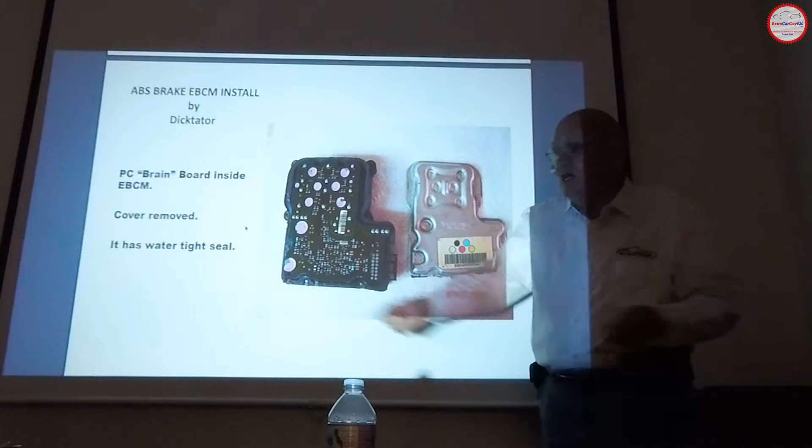Now here's what happened with copper impregnated boards. They use low temp solder when they go through the PC board wave bath solder. They go through, and they use low temp solder. Then you're 3 inches away from a catalytic converter that's running at 1800 degrees. And eventually, because you're in town stopping at traffic lights and bouncing, these become unsoldered. This is where the relay connection is, and these have to be soldered, and these have to be resoldered, and all of these have to be resoldered.

How do I know? Because that's what I do. I use the high temp solder on the bottom side of the board. I clean all of this solder off, I get back in it, and then I resolder it. 99 times out of 100, that's what it is. I got one the other day where the relay is bad, and that relay has to be taken off, so I gotta take the whole printed circuit board out and change the relay. Now, my SoCal guy did a heat shield.

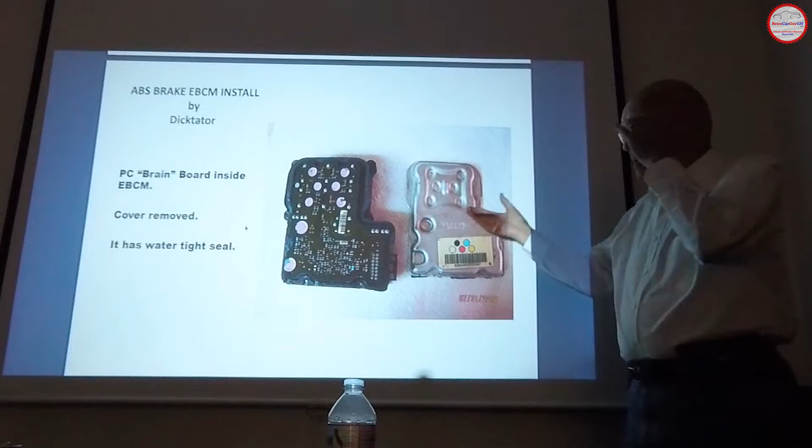Yeah, I had that heat shield put in. Would it take care of that or not quite? Maybe. Here's what happened. Mike and I were trying to address this ABS system, because you can't get these in as far as I know. Actually, one of the owners in Sacramento said he was able to buy that off of rockauto.com. He got one and had the shop put it in, but it ended up not working, because the 0304 won't work on the 0506.

Already been there, done that. We tried it. Well, here's the biggest thing: even if we could find another one somewhere, it wouldn't have the higher temperature solder. No, I mean, it's all going to be waste. So anyway, I use a desoldering tool to suck all of that off, and I put new solder on.

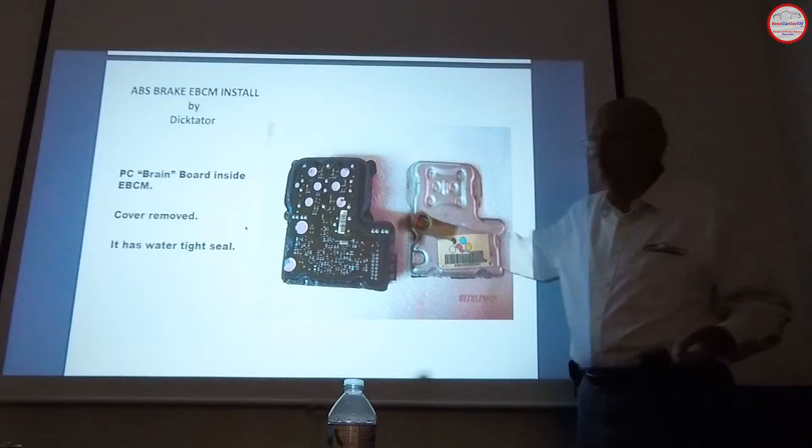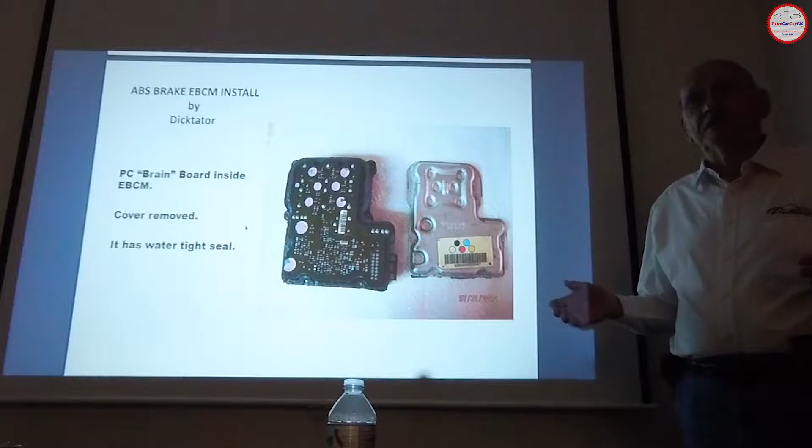And then we went to the heat shield, Mike and I talked. He's using aircraft insulation, or whatever it is, on that piece. We're saying for $50, it's worth a try. The jury's out on whether it will totally eliminate the problem or not, but it certainly will reduce the potential. Cheap insurance, right. That's very good.

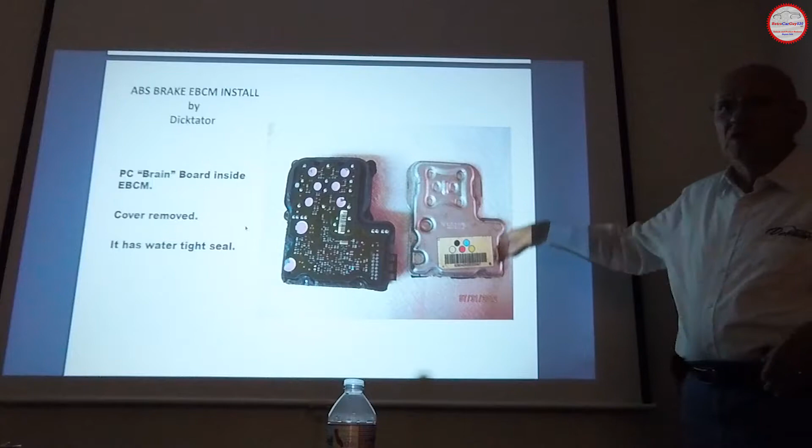If you've gone through and resoldered it once, the high temp solder seems to hold. But even then, you're getting into the range of that solder too, with 1800 degrees, so the heat shield's gonna help do some anyway. But the heat shield should work. The problem is not mileage or age, it's sitting at traffic lights or in parking lots.

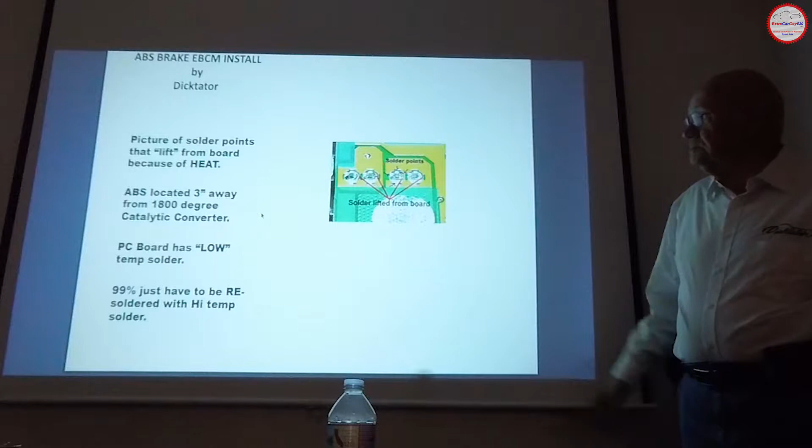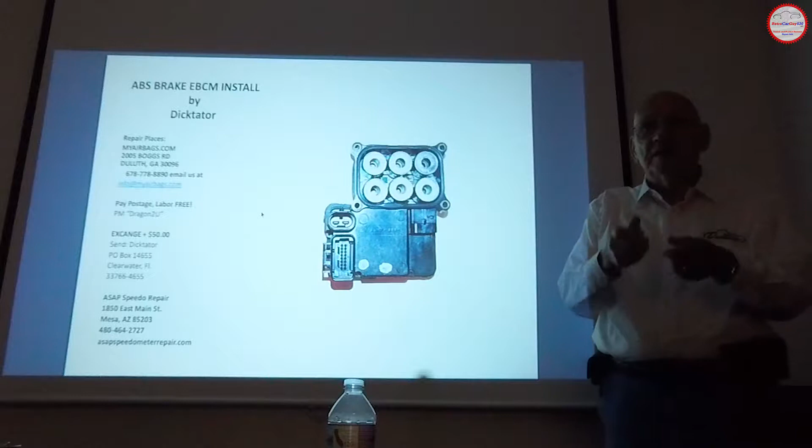It's hot. I didn't know that much about it, but when Mark did it and he was showing me, it gets so hot that the solder lifts. These solenoids - see, with my Tech 2, which I didn't bring with me, I can make the ABS, EBCM module jump your truck, boom, boom, boom, boom.

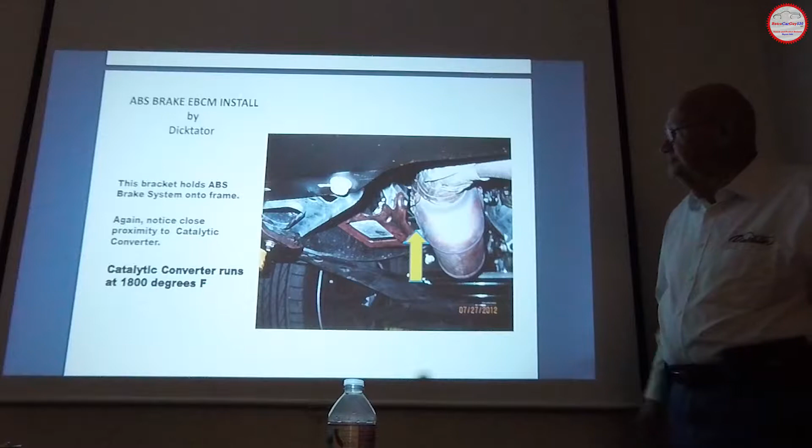The only thing that you're eliminating is sliding on the road at 80 miles an hour with your wheels locked. See how close you are to the catalytic converter. Oh yeah, big time.

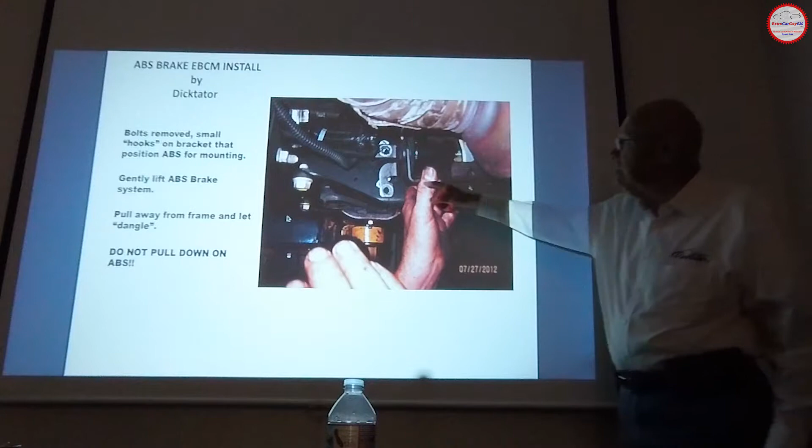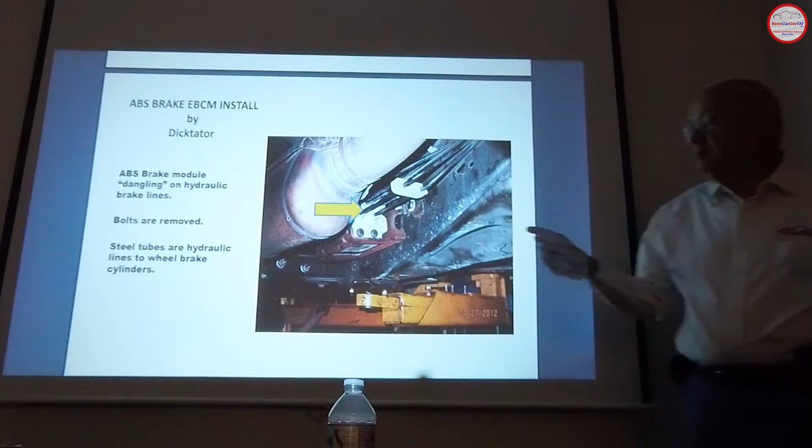These are all keyed on, so you have to pull the lock. By the way, you have wheel sensors, and the wheel sensors are plugged into this. This has a little hook on it that hooks into the holes. On the wheel sensors, you have two front wheel sensors for your speed, for your ABS and all that.

They won't go bad, it's just a magnet. So if you have a sensor problem, it's not there, it's in the connector behind the tire, and it's on the ABS.

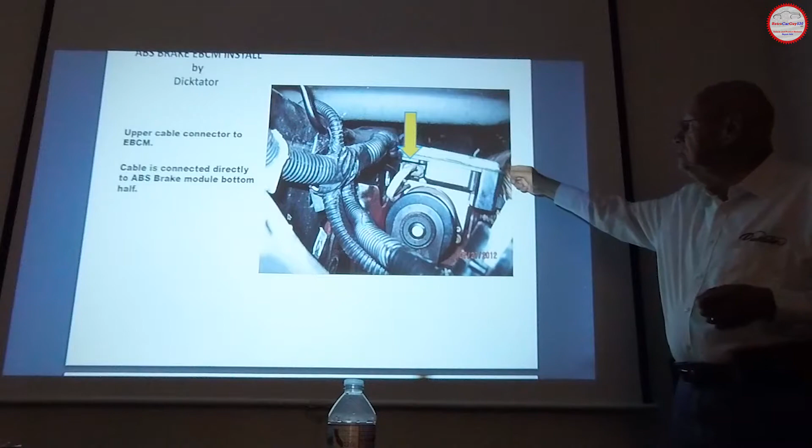When you loosen that front clip, you can drop this down far enough to get at the top of the EBCM there. Your number 20 Torx screws, I think they're T20 Torx screws, 1, 2, 3, 4, and you take it off.

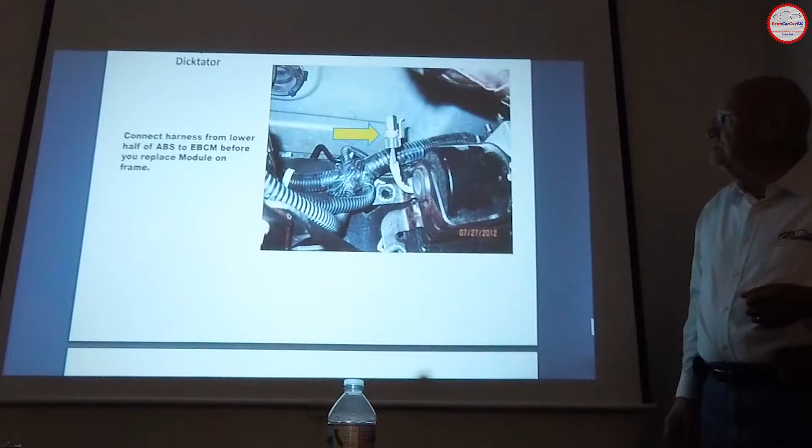Like that. And these are your solenoids, and they pump up and down. See, that's where it sets in there. See the little hook?

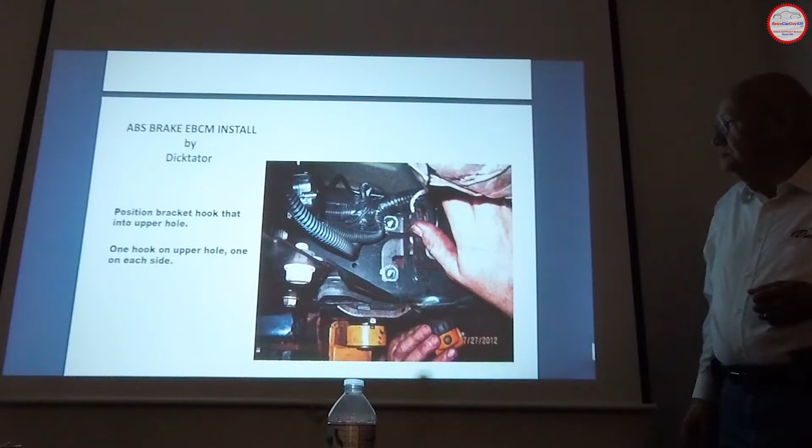I tried to explain it so you guys will be able to do it picture by picture. Now the problem is lying on your back up under there, trying to hold the book between you and the chassis. So while you're doing it, then the flashlight goes dead. It's a lot easier on a lift, that's for sure. Roll out, look at the next picture, roll back in. Roll out, look at the next picture, roll back in. There you go.

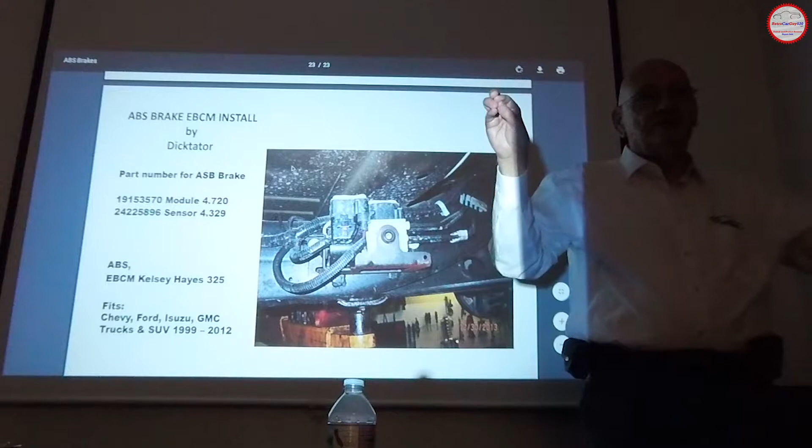But anyway, the sensors, you got two front wheel sensors. They go back to the frame, behind the tire, to a plug connector. When you get the tire off, you may want to check that connector, spray it with some dielectric grease or tape, put that on. The rear wheels are sensed by a module that's plugged into the transmission. What they're doing is reading the drive shaft speed instead of each wheel. So you don't have any wheel sensors per se on the rear wheel itself. It's right on the transmission, and I've had to change mine.

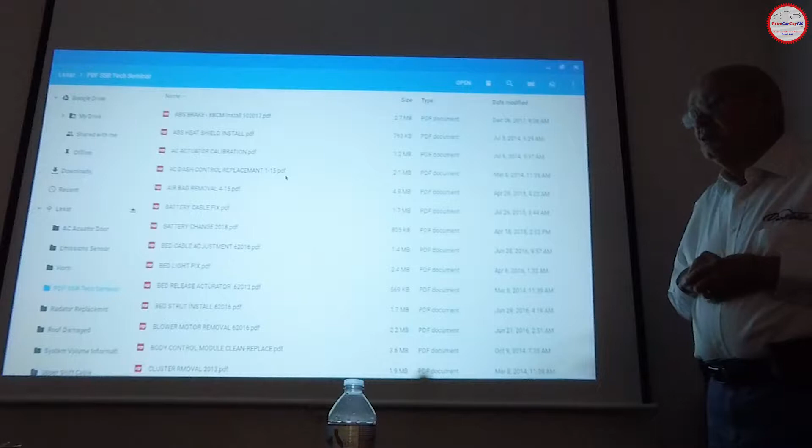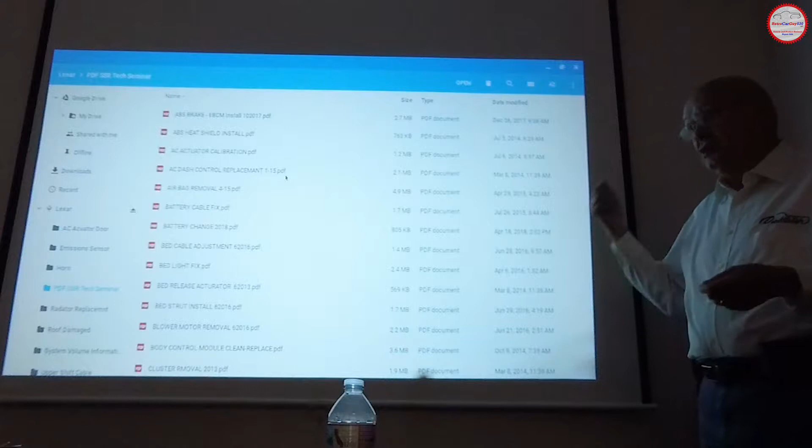Well, let me ask you a question, because I get a speed sensor error. Is that what we're talking about? Probably, yeah, so I just go in and turn the thing off. Well, the first thing I would change is go back to grounds. Go to that ABS ground behind the rear tires, check that, and then check the sensor on the transmission. I had to change mine out, it's very easy to do. It just unplugs, comes right out of there. Put another in, just make sure the plug is plugged in properly.

Well, we can put my code reader on, I've got them with me, or if you, just so we can see the code, which one it's pointing at as far as which one it thinks.

Starting to get a lot of the door latch lock module problems, which I've been repairing now for several years, because you can't get those things, and that's part of the module that talks to the multiplex wiring. That's the one that unlocks your car. There's a little electric motor in there that runs the fob and stuff. And everything gets corroded because the water comes down. I don't care if it's raining, you wash your truck, whatever you do, the water goes down the window. And they didn't put any provision over the top of that door lock module.

What we did was we took some silicone grease you can buy at Napa, for $8 a tube, $6 a tube in Florida, but it's $12 here. Plus you take the disposal fee. So anyway, you take a little silicone grease and take one of those tongue depressors and put some grease on top of it to get the water to run away from it because it is open.

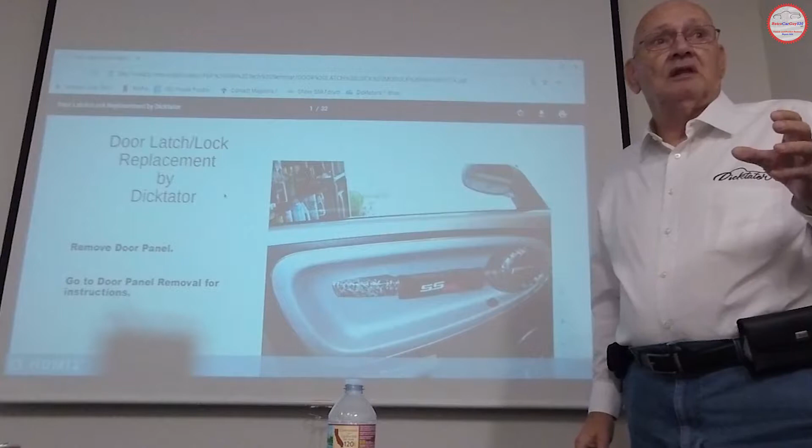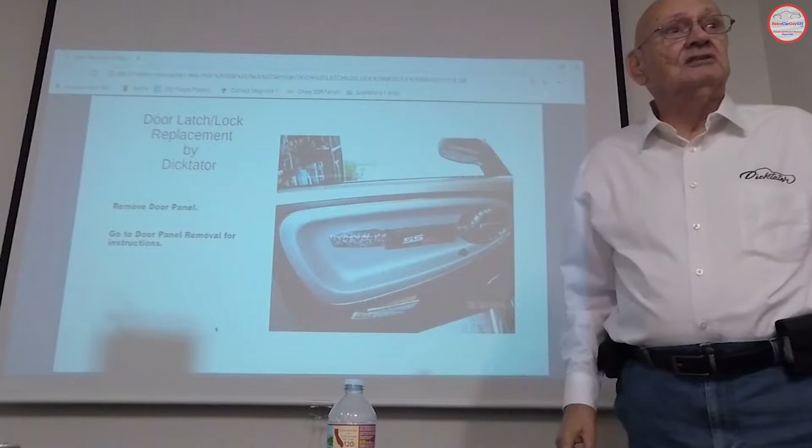Didn't you mention something about spraying into it? Absolutely, yeah, I brought a can of that stuff just for you, so you can show me. Silicone, not WD-40, I don't care. It's something to keep the water, when it runs down your button, from going inside the module and shorting out all the wiring. But you don't want to use regular WD-40, because that collects dust. Yes, this is the exact silicone.

Go ahead, Lance. Go ahead. I'm showing you, it'll be stamped left and right. Go ahead, I wanted to get down to the bad part. Is it? That's the bad, that's pretty bad.

Look, there's a picture of Dicktator on the inside of his car. Well, they accused me of... Get a shirt on, gee. Well, it's Florida, yeah, it's Florida. So they accused me of having my truck just Velcroed together.

Anyway, so you got to pop all this. It's a pain in the ass to take this thing out of here because you're working between two panels. Have to do it twice when we have, I think the reverse motor for the lock.

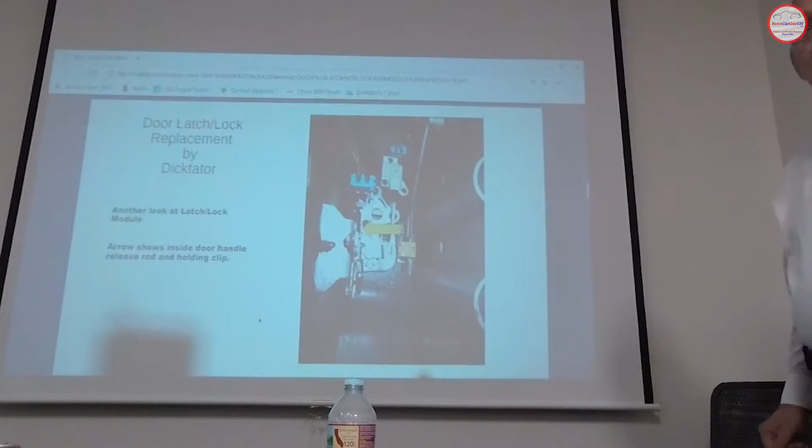Velcro accusation came from Jody and your wife. I think so, I know my wife was in there somewhere with that one. I think they were talking.

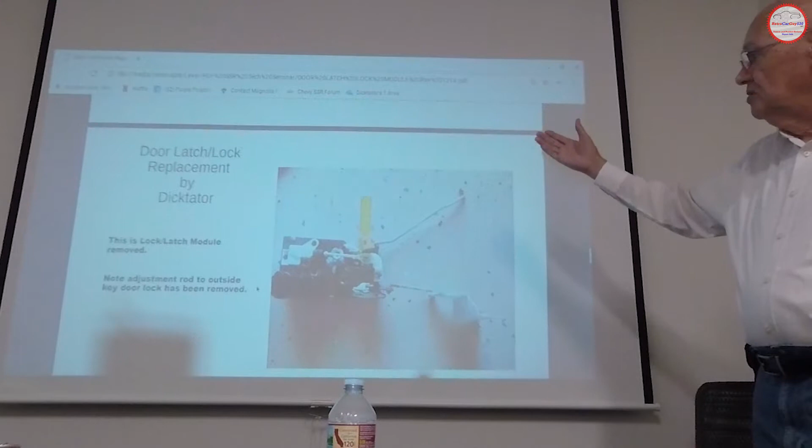Anyway, I tried to show you step by step. Now, this was on Tony's truck, and one of the connectors had a short in it. So we went down to Dimitrov and got another connector, and it had 4 wires, and we only used 3, but it works fine. You can see how cruddy and dirty it is, because when you get down to where it's opened up, you can see where all the water runs into it. I use that dielectric grease around the rubber boot on the connector to keep the moisture out of it. Florida is bad on corrosion.

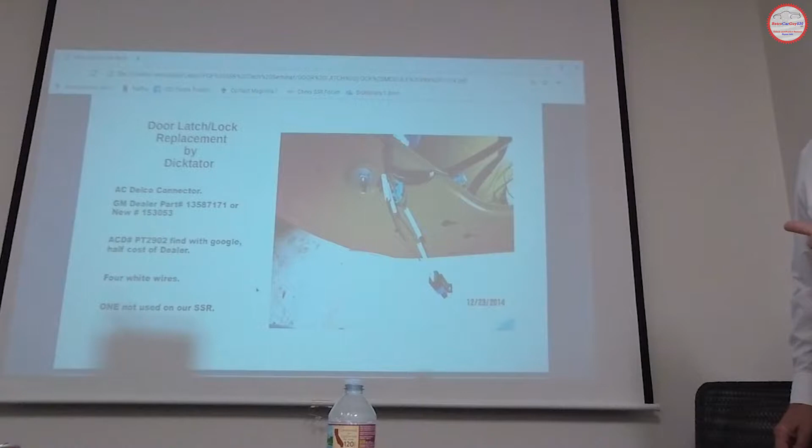On my SSR, the passenger side window was indexing phantomly after I turned it on, or it started, it would go back to the run position. Ended up finding that when I took that connector out, the seal had been folded underneath at the factory, and water was getting into it. So once I dried that out and everything, you were okay. Yeah.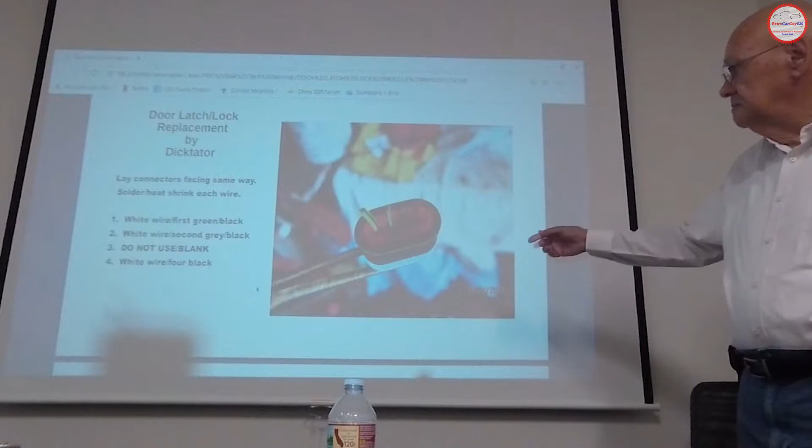Go ahead, that was that new connector we put in. It should be open back. We're getting down to the end of this one.

Now, pay attention to your roof door, your door latch lock motor, because you saw the pictures of that rusted motor in there. Yep. And those motors, I finally found them in China someplace, and when I got them, they turned clockwise. You gotta change them because it's gotta turn counterclockwise. So if you know how to take the motor apart and turn it so it goes the other direction, you can change your own motor. Now you have to physically cut the cover off to get to the motor.

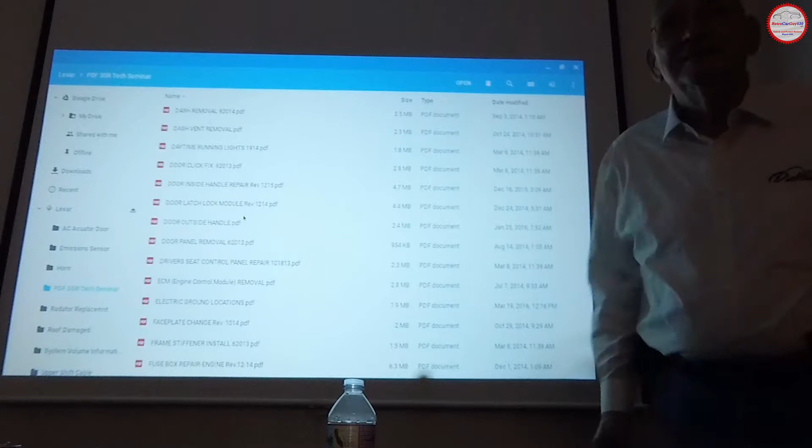So, I guess I'd say for $50 you send me yours. So you're already beyond my abilities there. It's pretty reasonable. Yeah, that's right. I mean, you gotta have the right tools to do the cutting. Well, that too. We could buy a few motors and try it, you know. But wanna make it challenging, you know.

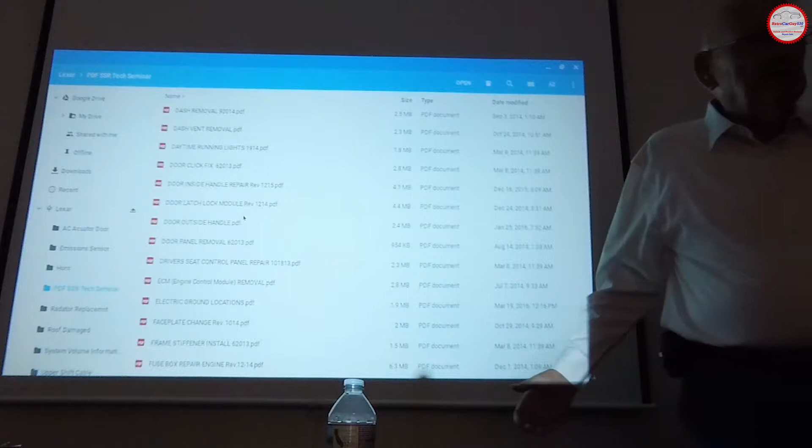The guy down there, the latch that you sent me, he calls me when he gets home and says, I went to get out of the truck and it locked the door on me instead of unlocking it. What? Yeah, and sure enough, that's when I called you. The motor was backwards, yes, and I didn't even realize it myself, of course, when I was putting it together. When I was in the truck, I pushed the button, it's going up and down. I didn't look to see if it was going up and down with the proper direction, but so.

This is where my Velcro comes in handy, to remove your cluster.

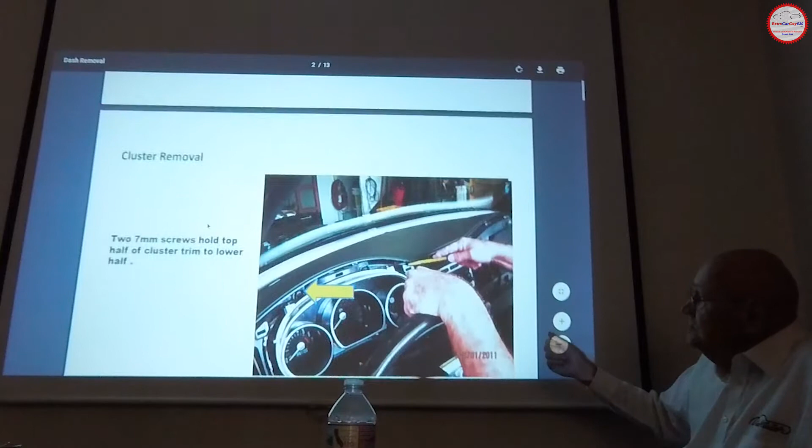So I have a question. Go back to the last picture. They're all 7mm, right there, that picture there.

Yeah, so when I first got into the community, there were some pictures around that were showing what I thought at the time was the quote-unquote preferred way of trimming the part of the dash that fits around the airbag cover. Yeah, that's in there. But I can't find that anymore, and that's not the preferred method. The preferred method you've been espousing for a number of years has been to remove the airbag cover screws. Yeah, why? What happened to the thing about trimming? Why did that become out of favor?

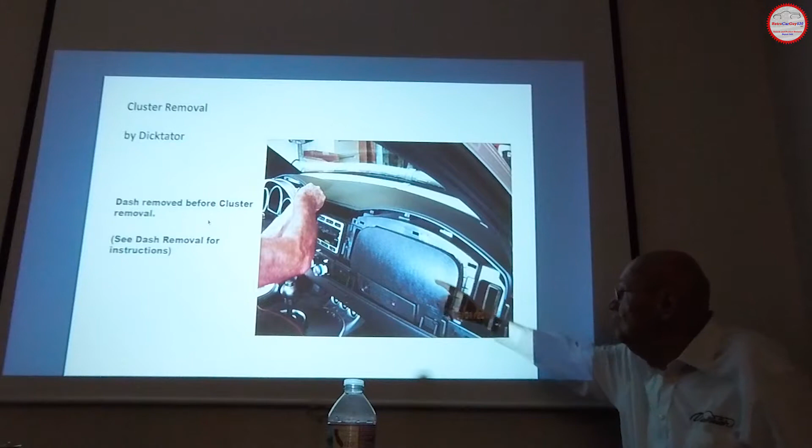Well, it's up to you. The difference is if you get rid of these two screws at the top that hold the airbag, you can just go underneath your glove box, take the two bolts off, and the whole thing comes off in your hand. But if you don't take these two off, you've got to cut all that trim and do all that stuff. But you can do it either way. Mine's done with both—mine's trimmed and I also went in and took the bolts off.

But you can do it any way you want to. Well, I wound up trimming mine because that's... I trimmed mine too, because on one side it's got a big lip, and it's hard to get the dash. That's an interesting material to cut because it's a different texture plastic than any I've ever messed with.

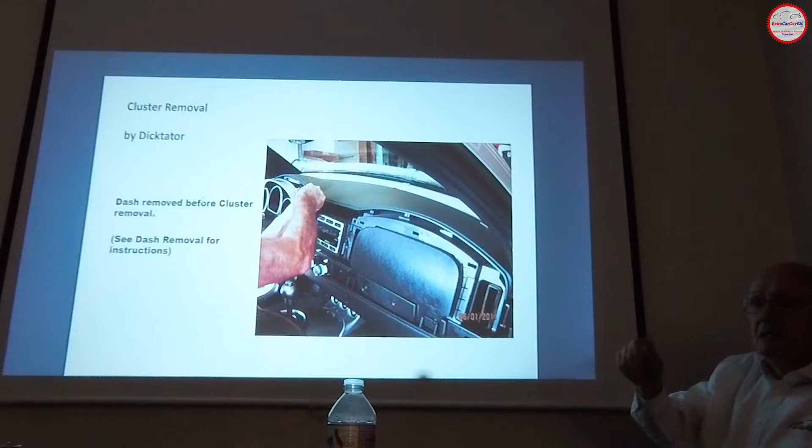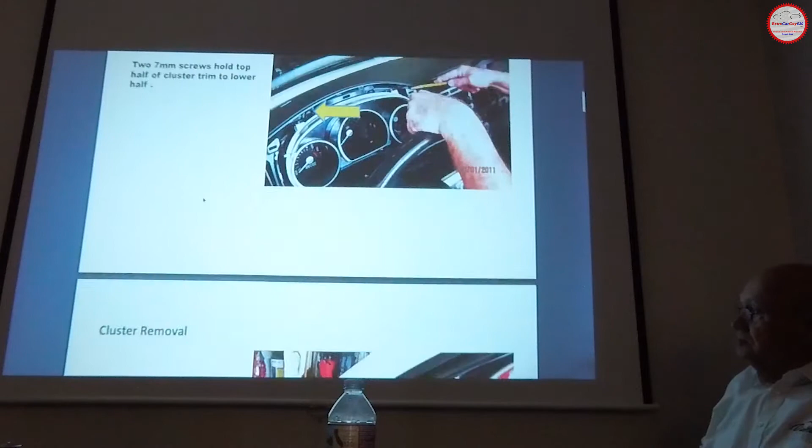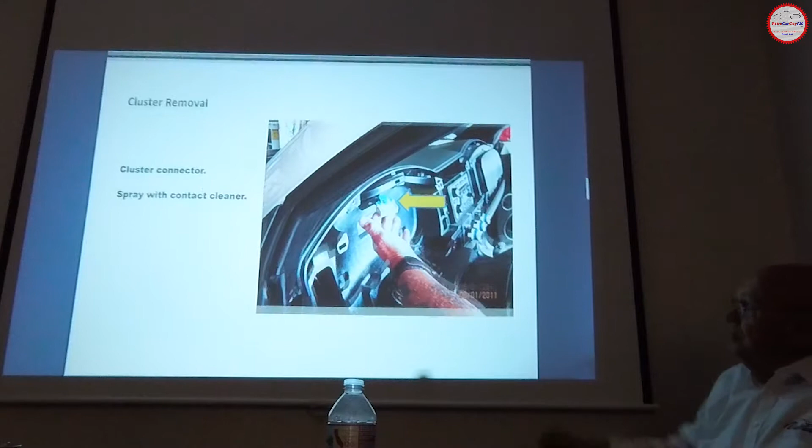See, that connector is part of my test stand at home. I have mine wired up to a power supply so that I can change the stepper motors and calibrate everything, put it together and hand it to you. Because I cheated, I got the connector.

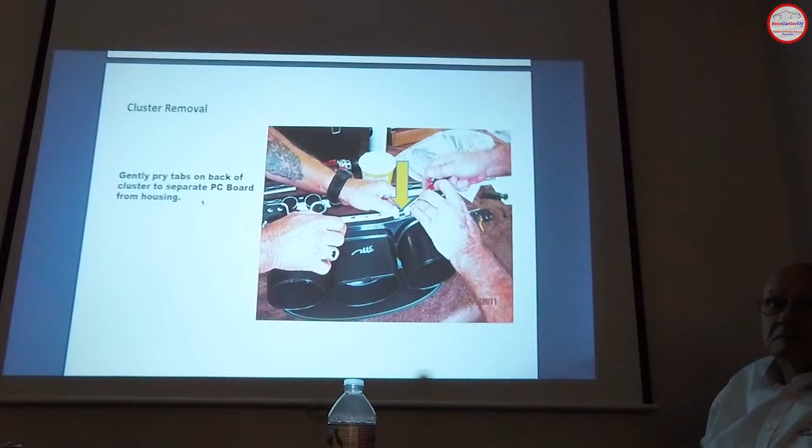One thing I see when people talk, there's been a lot of talk, especially lately, with all the new members. Nobody ever mentions anything about taking a look at that lens. The plastic lens, the clear lens. Mine was really scratched. Yeah, you gotta be careful what you use on it. I'm just kind of surprised nobody ever says anything. I've never seen anybody ever say, well, why'd you get it off? Take a look at that lens.

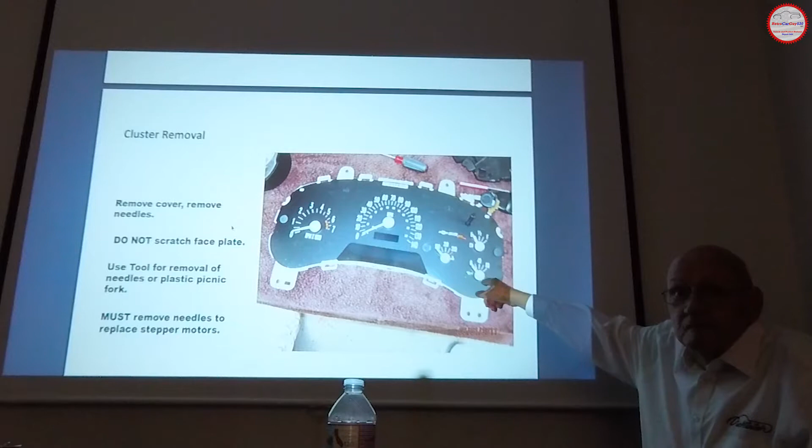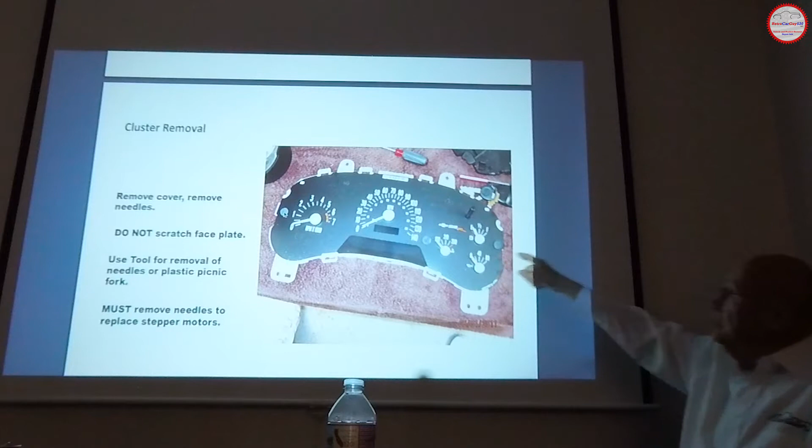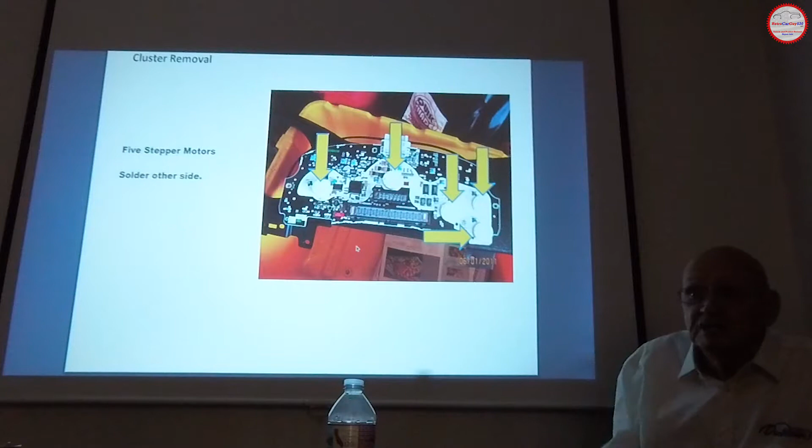Yeah, but what do you do when you change the color of the faceplate? How do you match it? I went down to Home Depot and found the little furniture plugs that are in yellow and red and black and whatever, and I changed them with that.

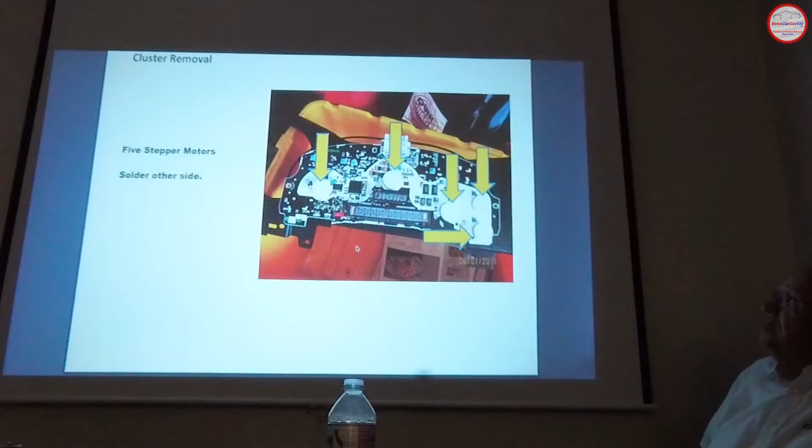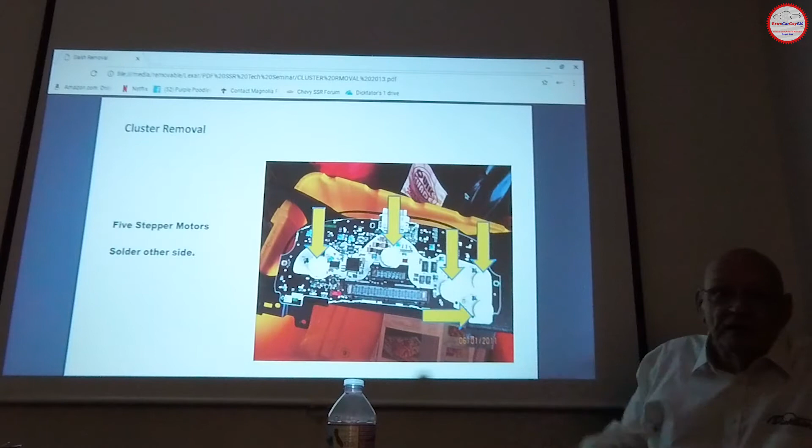You can change where you set it when you put them in. No, it's not a hard stop, you can move it, Dwight. There's a little more tension. You know what? You can move the needle, but you can't move that pin out of the stepper. Okay, I was talking about that. Yeah, you can move the needle.

There's a guy here in San Jose that does the, Chris, yeah, I keep getting emails from him all the time, for $100 to change the stepper motors and the lights. That's a good deal, that's who I used. But Dicktator and Dragon and Mike are a way better deal.

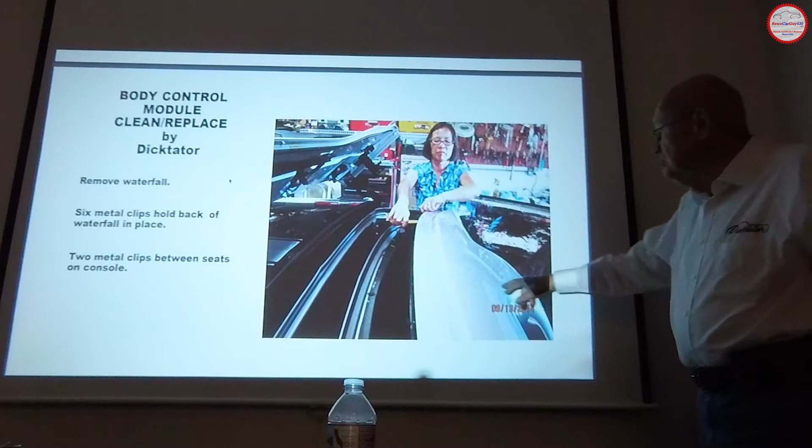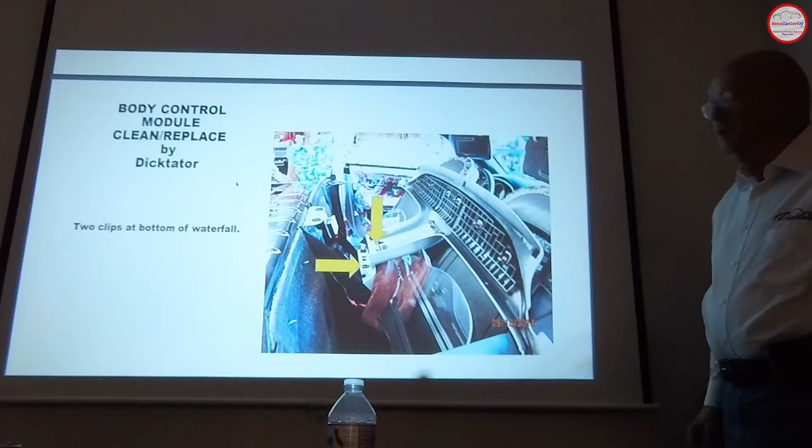So this is your waterfall that goes across. It's only held on with clips. See, it's only got these clips. Can you just pop that off? Easy to take off.

Because you gotta get to it once you get the wind suppressor out of the way. Because I've got a lighted one. This is how you take off your shift console cover.

You were talking about that earlier. Go ahead, yeah, mine is stuck. Well, sometimes it takes a lot of effort for most of them.

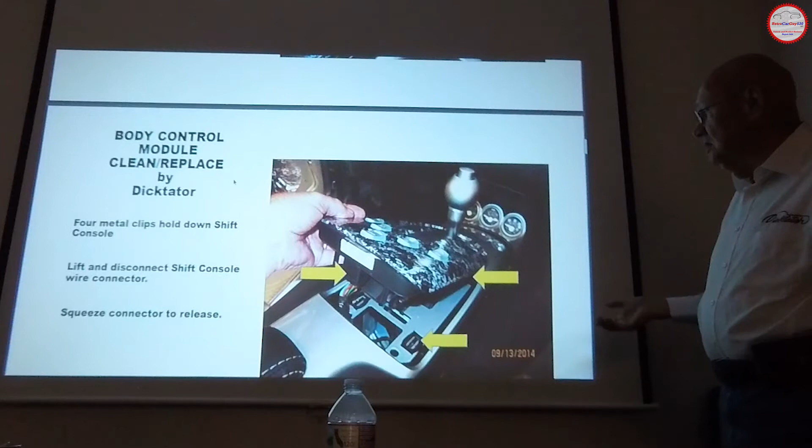This is that connector I was talking about. If you're having intermittent issues, these are extremely reliable switches, except when someone spills something in there. That's the hard thing to find.

I just had, I did Tom Sorensen I think it was, or Larry Town. One of their friends got stuck at the dealer, and the dealer, instead of loosening the set screw, which goes into the channel lock, thought it was threaded on and cracked the back of his chrome shift lever.

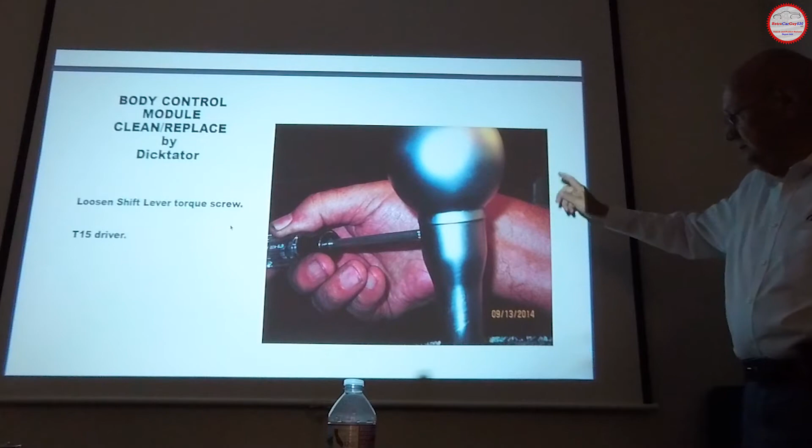I got a spare one. Cause see, that's what you got inside, and that bolt goes in that V groove on the back side. That thing's hard to pull out too.

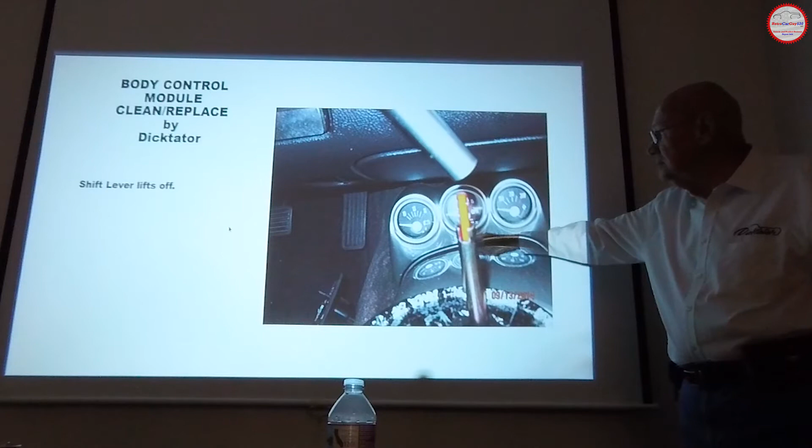Well, take that damn thing off and get some oil down in there. You gotta take care of it. I'm talking about this orange little post, it's tough. Yeah.

Then you gotta take off the front console. We're going after the body control module. Go ahead. I had to, well, they didn't want you to get at that, did they? No, I had to put one on mine. So I put on the body control module, being the wise guy that I am.

Well, that's plugged it in. Unknown driver. What do you mean unknown driver? I mean, it started, I could drive it, but it kept saying unknown driver. So go ahead.

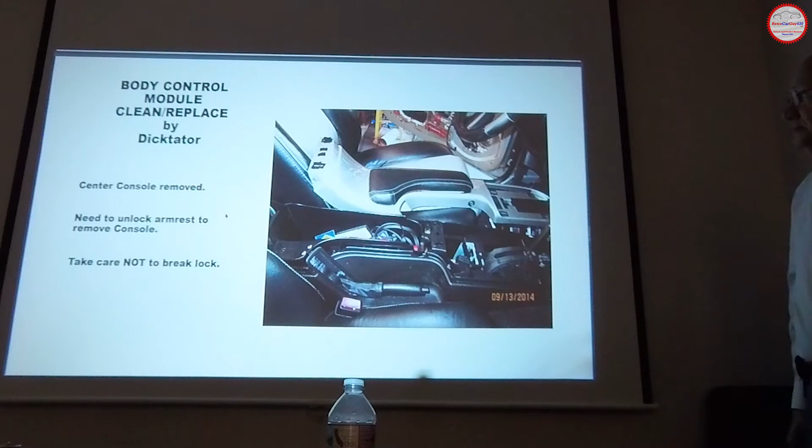So this is how you go ahead, and that's how you take that center console off. Some of it's Velcro. Easier with Velcro, yes. Now this is your back receiver for your fob.

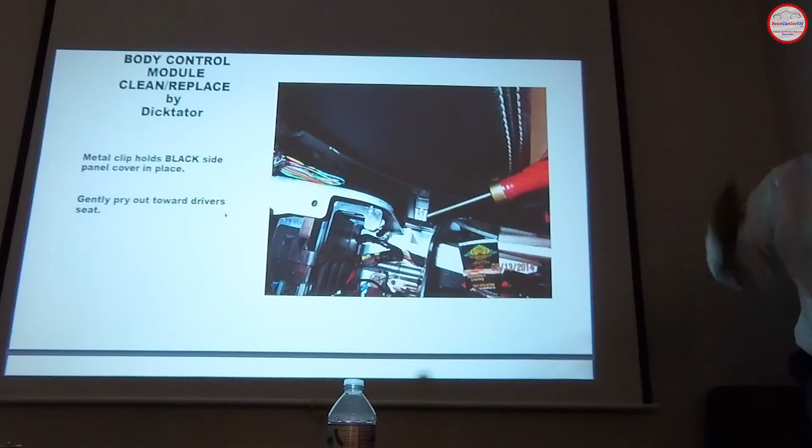For your fob. Where's the antenna? Is the body control module connected wirelessly to the two remote controls? And that's how it tells the receiver who's driver number one and who's driver number two?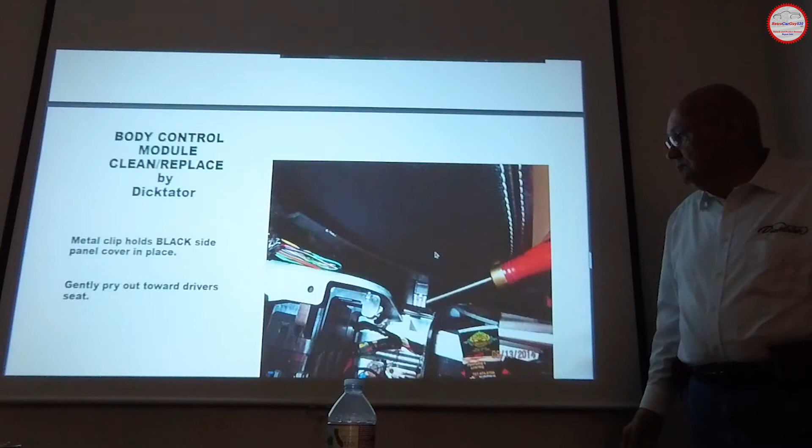No, the receiver determines that. Well, how does the receiver know? It's programmed. You have to pair the fob with the vehicle. How does it get programmed to your fob? Yeah, how does your garage door opener know?

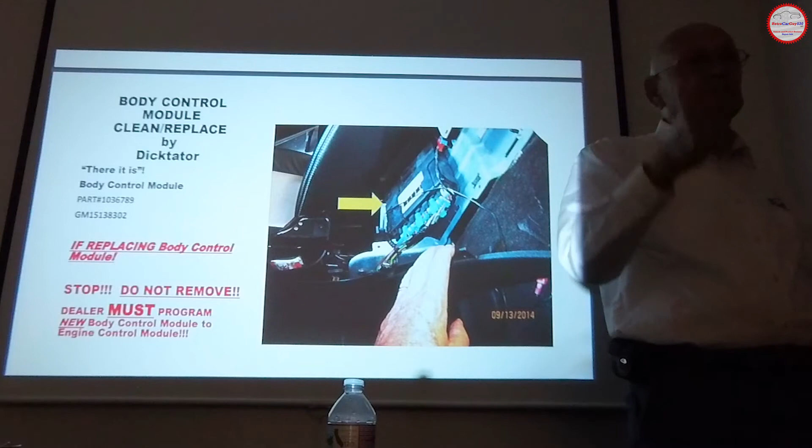I just wanted to know that the fob was driver one and the other was driver two. This up above is your body control module. And this, I can tell you for sure, has to be programmed by the dealer to your ECM, because we're back to multiplex wiring where everybody in the room's got to know each other. If they don't, it ain't gonna work. So when I changed my body control module, which is not that hard, and got my own driver, it's got to be dealer programmed to the VIN.

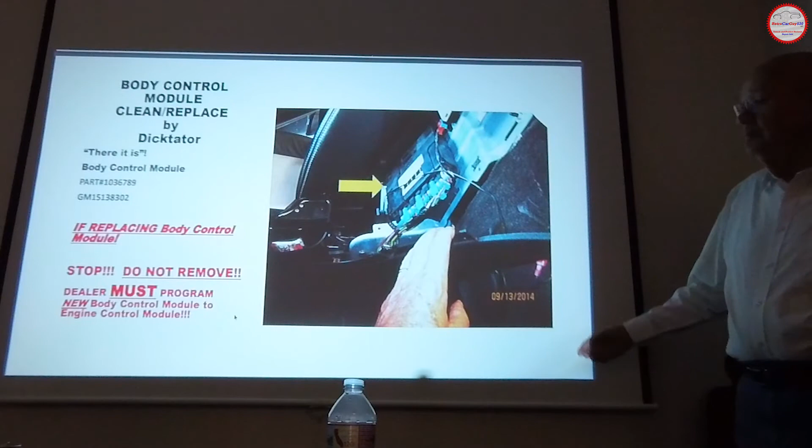So that's not something you can do with Tech 2 then? No, Tech 2 won't do it. Tried that. That's how they keep thieves from changing it. Dealer must program the body control module. Believe me. So can you button that all up, take it in, and they do it by plugging into the OBD?

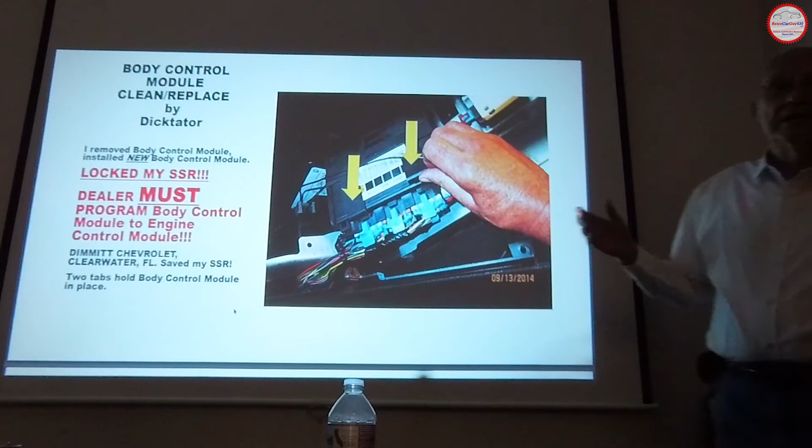Well, I didn't, yes I did, but I didn't button it all up. I left it open like you see it, and I drove it into the dealer and Sean programmed it for me. So it has to be programmed. Now here I'm talking about the fob. It just snaps in with little plastic clips.

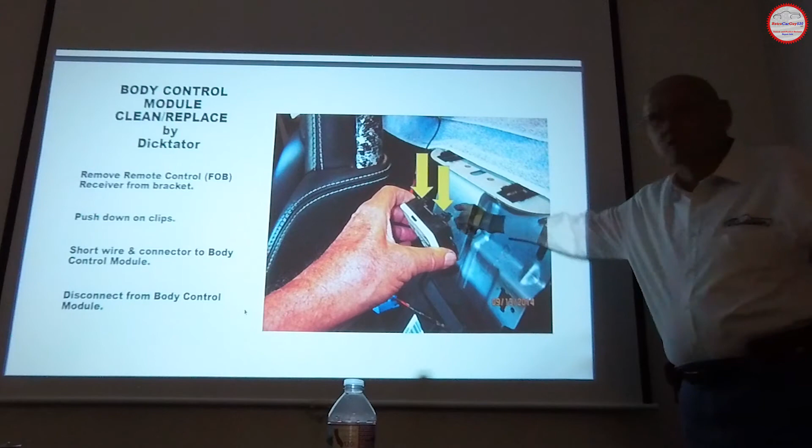But I can't emphasize enough that all of these modules are connected to talk to each other, all connected together.

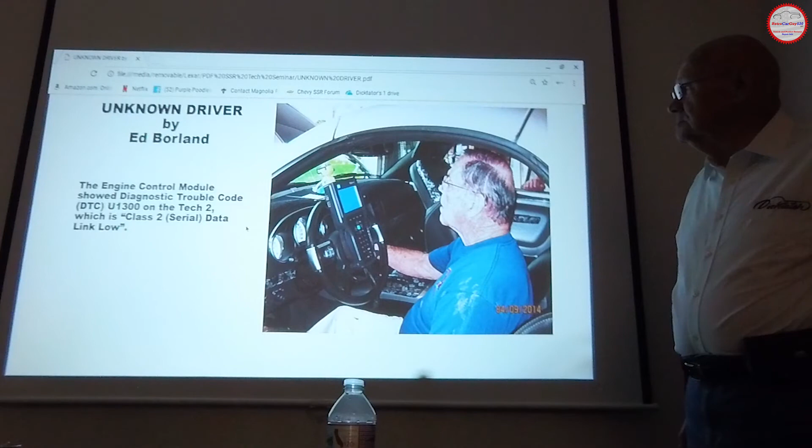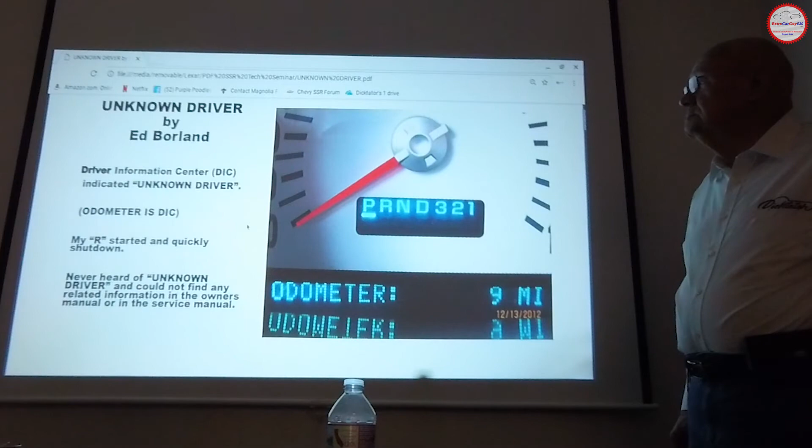What I think, 9 miles. How much are his? Go back, he wants to see the 9 miles. 9 miles. Huh, 2012, unknown driver. That's my Tech 2, Ed is electrical engineering.

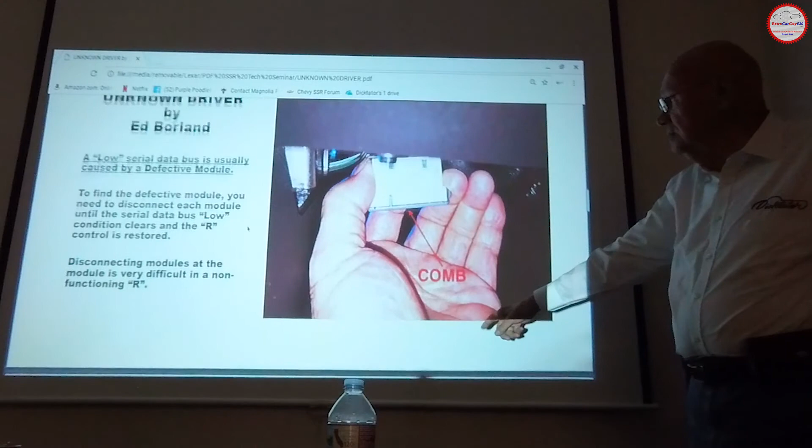While we're talking about Ed, it's a serial data bus. This is underneath the driver's side behind the headlights. Pull that out, go ahead. This is what I'm talking about. Is that the comb you were talking about, where everyone has to know what's going on?

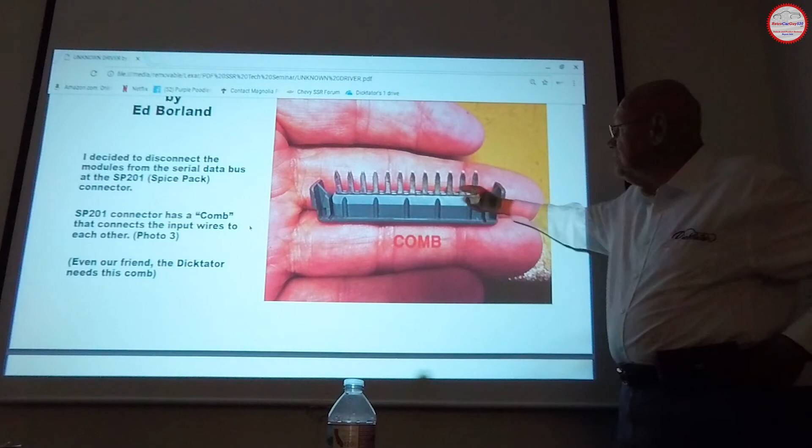All of these hooked together, and they all got to talk to each other. And if any one of them has a problem, that would shut your truck down.

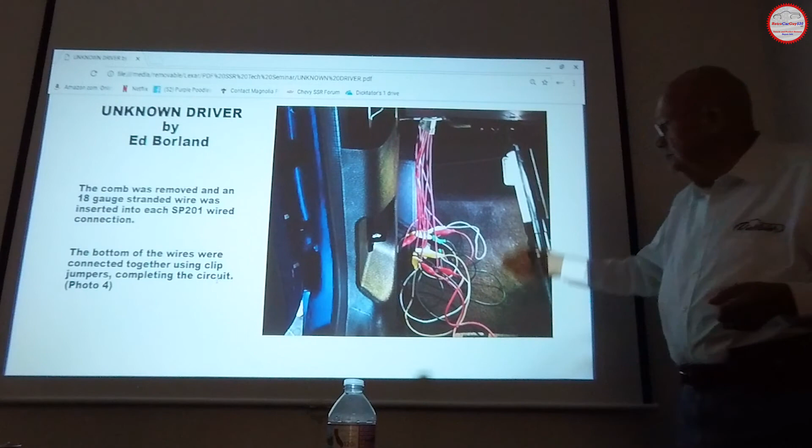And that's that multiplex wire. Okay, and who knows what's inside that plastic? This is how you find out which one is bad. What he did was he connected into each one of these, brought them down, and hooked them all together on the cone. Then you disconnect one at a time until you find out what the problem is.

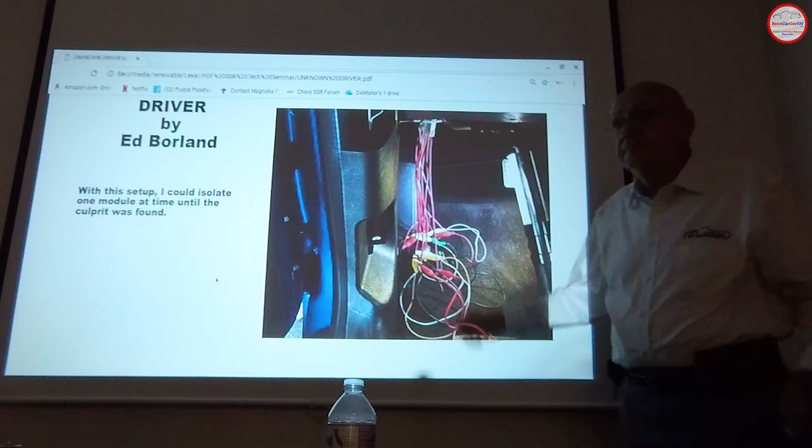So basically he's using that as a tester? Yeah, a jumper, and then you can disconnect to see what's what. So that's what you're looking at. Now, the unknown driver that Ed had on his truck, it was an '06 Pacific Blue, I believe.

He's had 4 or 5 trucks. And what happened, the unknown driver code showed up, and we couldn't figure out what it was with the Tech 2. Tech 2 wouldn't give us anything. So we went to Dimmitt Chevrolet, found Sean, who is the lead tech there. He put it on there and couldn't find anything the matter with it. So he cleared the tune that Joe Delano, or in this case Jeremy, had put into the engine.

When he cleared the tune, the Tech 2 says plug number 7 is cracked. So when it was going down the highway skipping and giving the unknown driver code, we had no way of diagnosing it because the tune in the computer had been changed. So GM's equipment couldn't read it because it had a different tune in it. He cleared the tune back to the original settings, and when he did, the equipment said plug number 7 is bad.

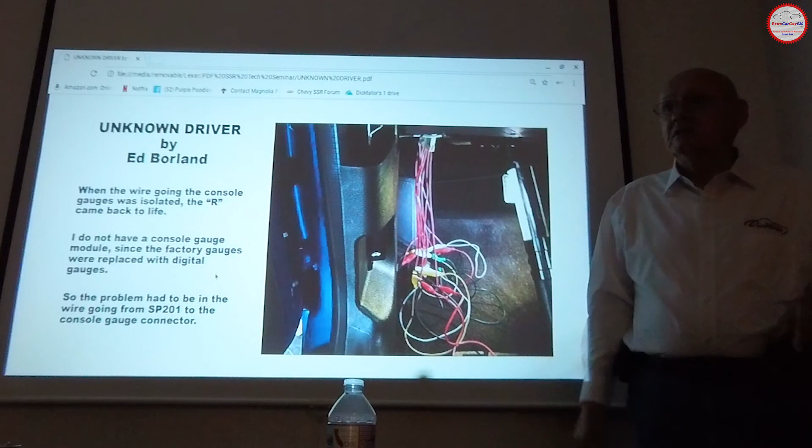Very clever on Sean's part. Yeah, very clever.

We've reached the end of this Electrical Part 3 video. Please check out the other videos that came from this same tech session by looking at the playlist named Chevy SSR Tech Session August 25th, 2018.